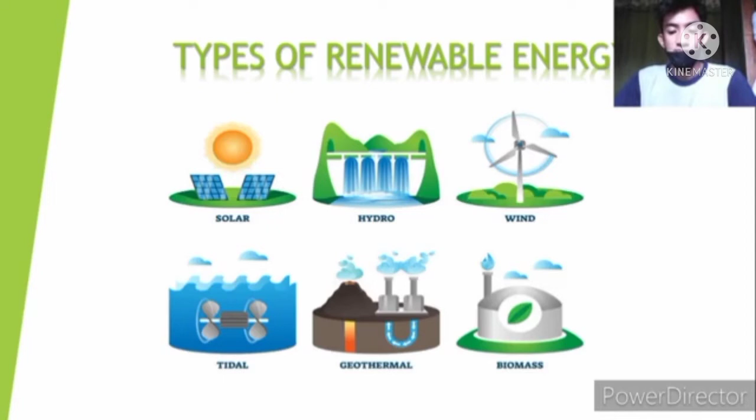Next, we're going to discuss ocean energy or tidal energy. So we have the power station. In description, tidal power or tidal energy is harnessed by converting energy from tides into useful forms of power, mainly electricity, using various methods.

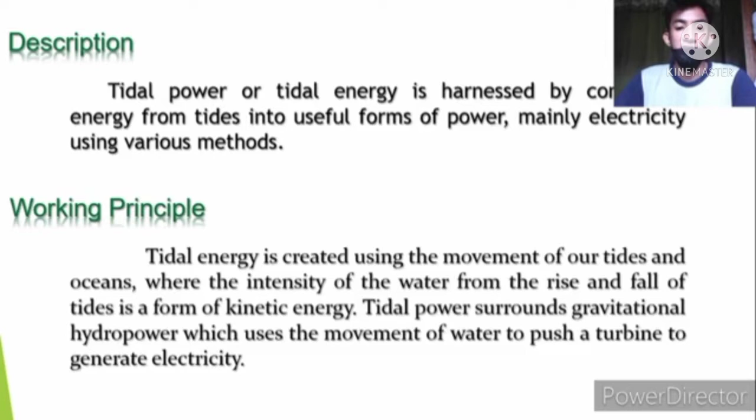The working principle of tidal energy is created using the movement of tides and ocean where the intensity of the water from the rise and fall of tides is a form of kinetic energy. Tidal power surrounds gravitational hydropower, which uses the movement of water to push a turbine to generate electricity.

So these are the causes and frequency of tides. We have the high and low tides, which are caused by the moon. The moon's gravitational pull generates something called the tidal force, in which this force causes Earth and its water to bulge out on the side closest to the moon and the side farthest from the moon. These bulges of water are called high tides.

Most coastal areas, with some exceptions, experience two high tides and two low tides every lunar day. However, a lunar day is 24 hours and 50 minutes. Because the Earth rotates through two tidal bulges every lunar day, coastal areas experience two high tides and two low tides every 24 hours and 50 minutes.

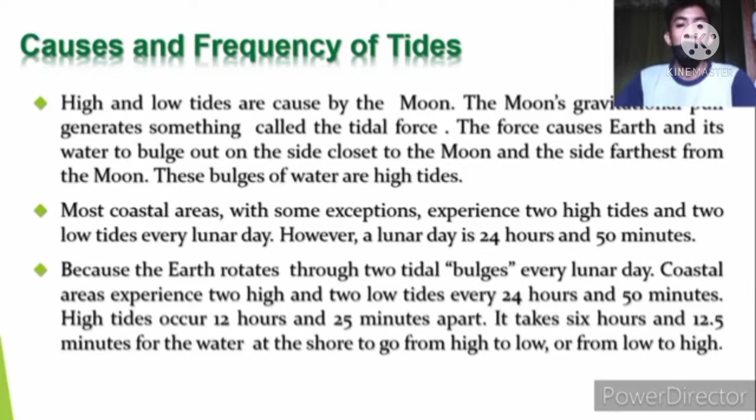High tides occur 12 hours and 25 minutes apart. It takes 6 hours and 12 minutes for the water at the shore to go from high to low, or from low to high.

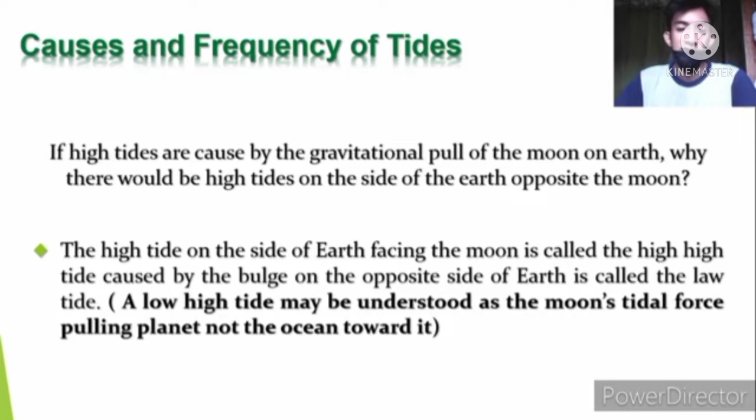So here's a question: if high tides are caused by the gravitational pull of the moon on Earth, why would there be high tides on the side of the Earth opposite to the moon? The answer is the high tide on the side of Earth facing the moon is called high tide, while the bulge on the opposite side of Earth is also called high tide. Low high tide may be understood as the moon's tidal force pulling the planet, not the ocean, toward it.

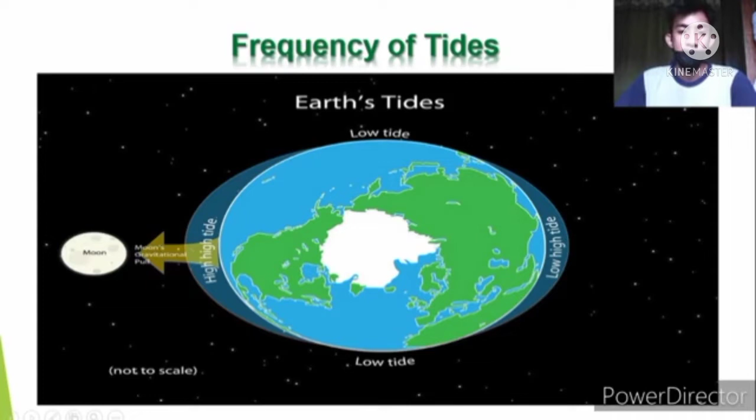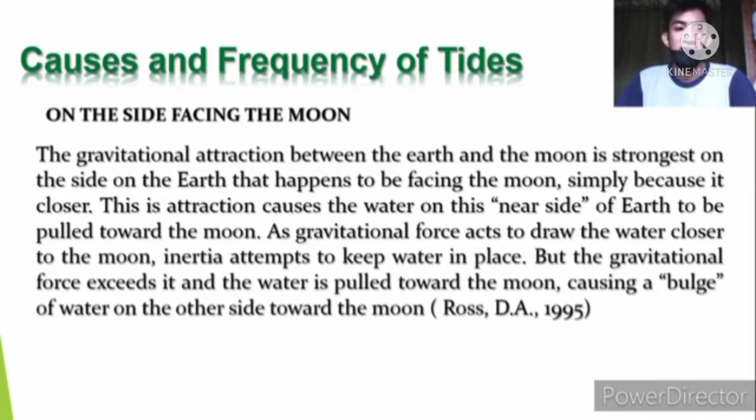On the side facing the moon, gravitational attraction between the Earth and the moon is strongest on the side of Earth facing the moon, simply because it is closer. This attraction causes the water on the near side of Earth to be pulled toward the moon. The gravitational force acts to draw the water closer to the moon, while inertia attempts to keep the water in place. But the gravitational force exceeds it, and the water is pulled toward the moon, causing a bulge of water, as stated by Ross in 1995.

Ross also stated that on the opposite, or far side of the Earth, the gravitational attraction to the moon is less because it is farther away. Here, on the far side, the inertia exceeds gravitational force, and the water tries to keep going in a straight line, moving away from the Earth, also forming a bulge. Then gravity and inertia act in opposition on the Earth's ocean, creating tidal bulges on opposite sides of the planet.

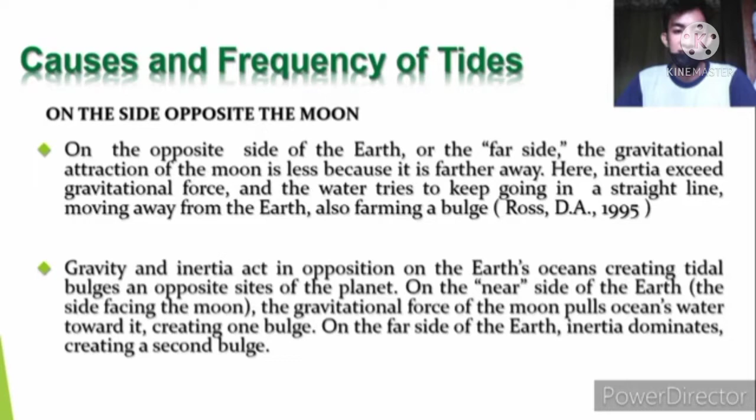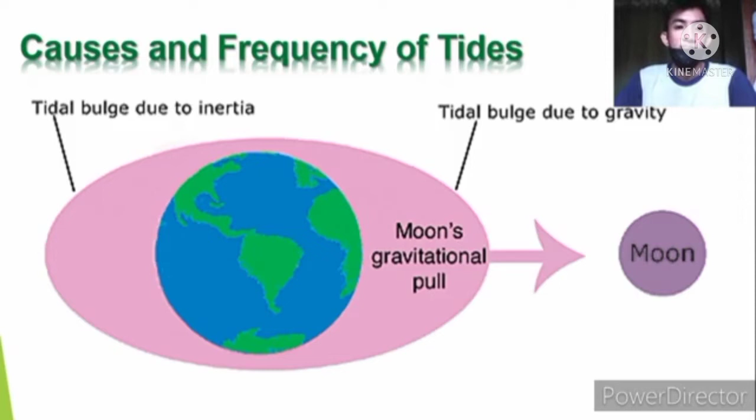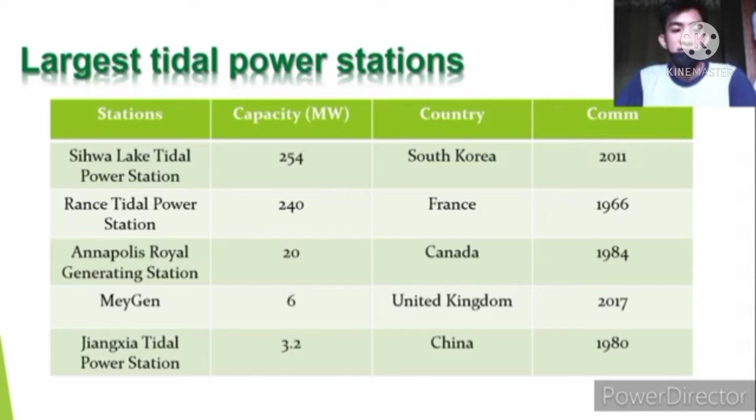This slide shows one of the largest tidal power stations. We have five here. First, the Sihwa Lake Tidal Power Station from South Korea, with a capacity of 254 megawatts. Second, the Rance Tidal Power Station from France with 240 megawatts, and the Annapolis Royal Generating Station in Canada with 20 megawatts. MeyGen has 6 megawatts, from the United Kingdom. Lastly, we have the Jiangxia Tidal Power Station located in China, with 3.2 megawatts.

So the next slide will be discussed by Miss Nagayo, which is the types of tidal power. Una dito is yung tidal stream generator. Tapos yung next naman is yung tidal barrage. And syempre yung last yung tidal lagoon.

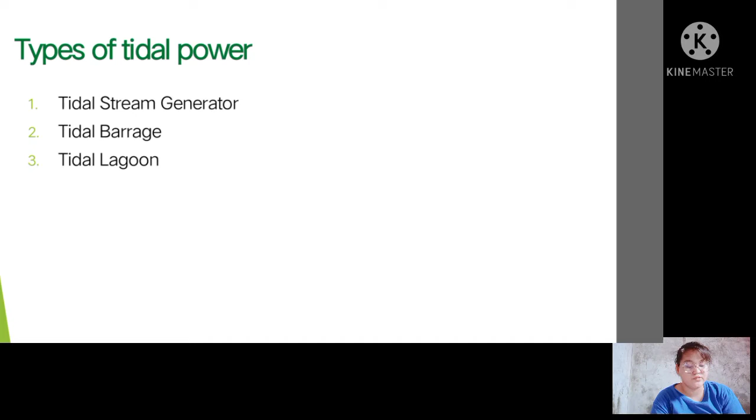A tidal stream generator is very similar to wind turbines except they are below the water surface instead of above or on land. The water's current pushes the blades of the turbine, which is connected to a generator that creates electricity. Yung tidal stream generator daw ay gumagamit ng kinetic energy ng gumagalaw na tubig upang paikutin yung isang turbine, katulad sa paraan ng paggamit ng wind turbine na yung ginagamit ay hangin para makalikha ng kuryente. Gayunpaman, ang power na magagamit para sa tidal power generation sa isang particular na lugar ay maaring mas malaki kaysa sa wind turbine dahil sa mas mataas na density ng tubig.

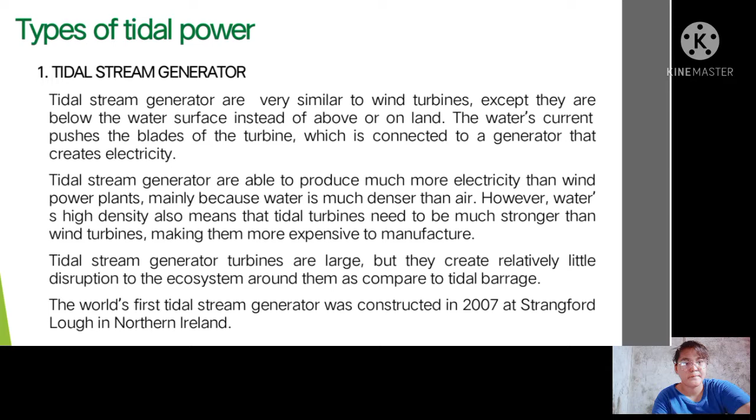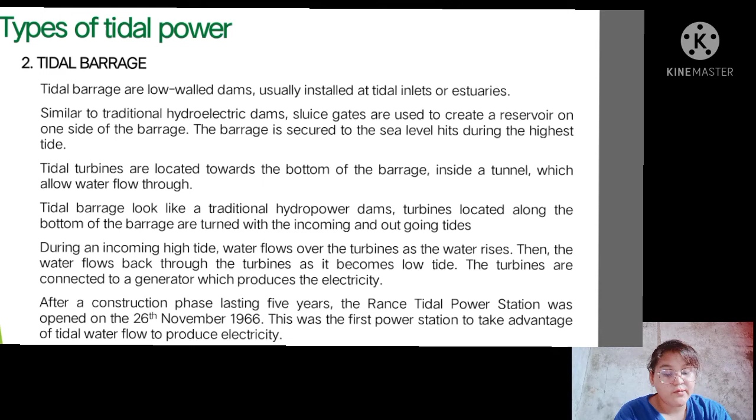Sa tidal barrage naman, yung mga turbine niya ay nasa loob ng barrage na gumagamit ng lakas ng tubig, sa parehong paraan na ginagamit ng isang river dam. Yung mga barrage gate ay bukas habang tumataas yung tubig. Tapos kapag nagiging high tide siya, nagsasara yung barrage gate kasi lumilikha ito ng pool o tidal lagoon. Pagkatapos, yung tubig ay inilalabas sa pamamagitan ng mga turbine ng barrage, na yon yung nagiging dahilan para makalikha ng enerhiya sa mabilis na pamaraan na maaaring kontrolin ng mga engineer.

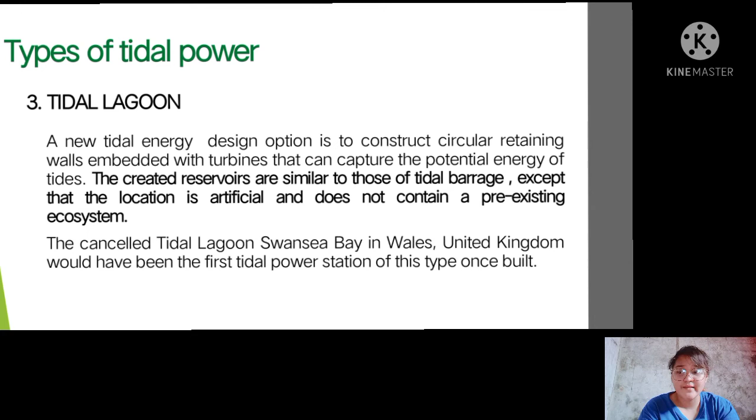Tapos yung last natin ay yung tidal lagoon. A new tidal energy design option is to construct circular retaining walls embedded with turbines that can capture the potential energy of tides. The created reservoirs are similar to those of tidal barrage except that the location is artificial and does not contain a pre-existing ecosystem. Dito sa tidal lagoon, gumagana yung mga turbine habang pinupuno at nawawalan ng laman yung lagoon. Unlike tidal barrage, itong tidal lagoon ay pwedeng itayo sa natural na baybayin.

Advantage of tidal energy. Tidal energy is a renewable source of energy, which means the energy doesn't deplete as it's used. Ang tidal energy ay isang renewable, hindi basta-basta nauubos, di katulad ng hangin o araw. Pag walang hangin, walang energy, at pag walang araw, walang energy.

Zero carbon emissions. In addition to being a renewable energy source, tidal power stations do not emit greenhouse gases during electricity generation.

Predictable. Tidal currents are highly predictable. Low and high tides follow a well-known cycle, making it easier to know when power will be produced. Ang current na inilalabas ay malalaman agad kung mataas ito o mababa dahil sa flow ng tubig.

High power output. Tidal power plants are able to produce high amounts of electricity. One of the main reasons for that is because water is dense, almost 800 times more dense than air. This means that a tidal turbine will produce substantially more energy than a wind turbine of the same size. Ayon dito sa high power output, mas maganda ang tidal power plant dahil mas lamang ng 800 times dense ito sa hangin at kayang bumuo ng mas mataas na enerhiya.

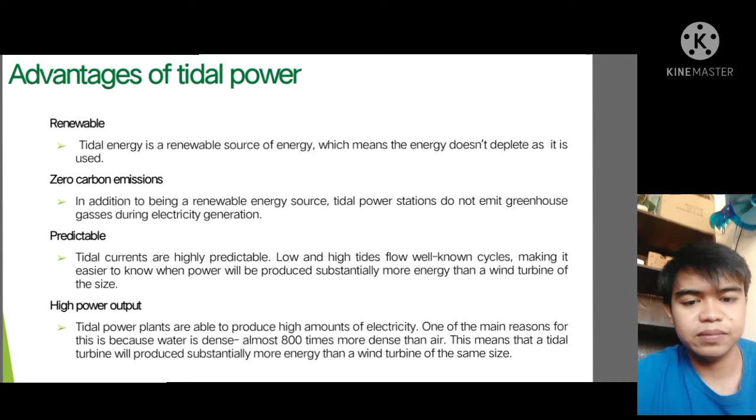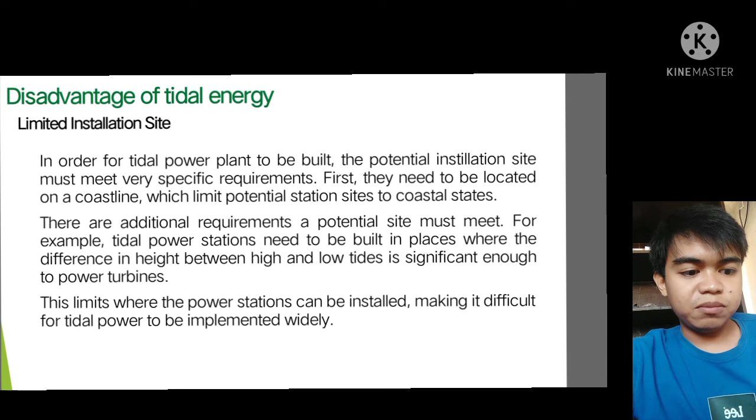Pangalawang disadvantage of tidal energy, expensive. One of the biggest drawbacks to tidal power is the high upfront cost. Tidal energy turbines need to be much stronger than wind turbines because of the high density of water. Most tidal power plants currently in operation are made of tidal barrage. The construction of tidal barrage is extremely expensive. The Rance power plant was expensive to build in its day and took about 20 years to actually pay for itself. This is one of the major reasons that the proposed Severn barrage has not gone ahead.

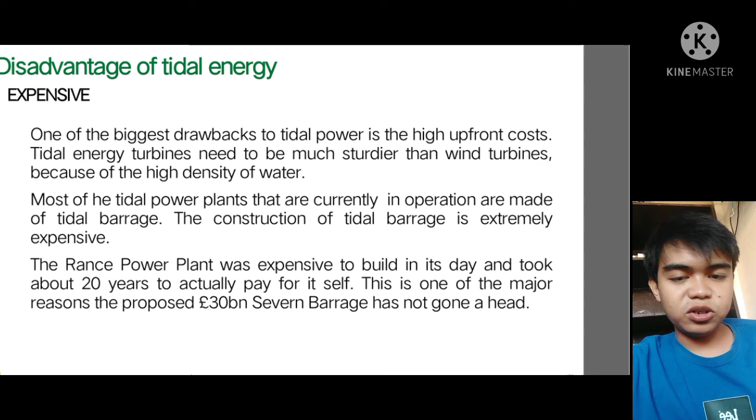Tidal barrage disrupts the natural flow of water in and out. This can have an effect on marine life, disrupting life cycles and spawning. Underwater turbines have the potential to kill marine life, much like wind turbines kill birds. The concern is valid among all tidal power plants, but larger marine life is likely to only be affected by tidal stream generators.

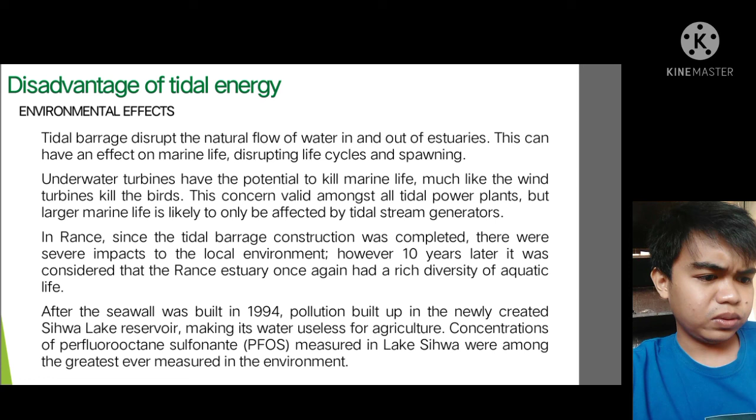Since the tidal barrage construction was completed, there were severe impacts to the local environment. However, 10 years later, it was considered that the Rance estuary once again had a rich diversity of aquatic life. After the seawall was built in 1994, pollution built up in the newly created Sihwa Lake Reservoir, making its water useless for agriculture. Concentrations of perfluorooctane sulfonate measured in Lake Sihwa were among the greatest ever measured in the environment.